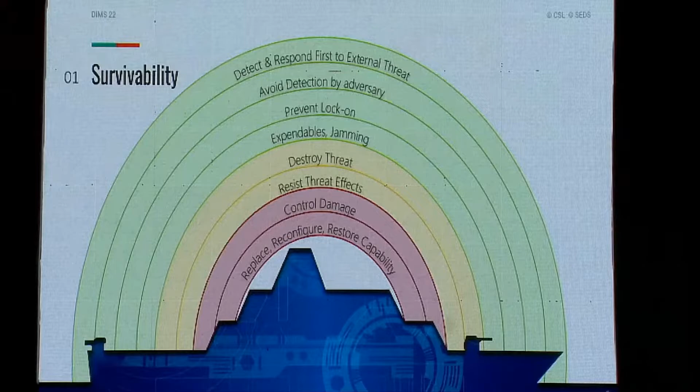Vulnerability is about the selection, disposition, as well as integration of weapons, and how you destroy a threat, for example, close-in weapon systems or missile defense systems, and also resisting the threat effects. If you are attacked, how you design and build it such that the threats are within certain limits. And then recoverability is about controlling the damage, and replacing, reconfiguring, and restoring the capability of the system.

Susceptibility, as I mentioned, the first thing is about signatures. You have many different types of signatures which can be detected by your enemy. So you look at different aspects like your radar signature, the high frequency communication which can be detected and tracked by your enemy, laser signature which can be used by the enemy for ranging, optical signature, hydrodynamic pressure which can be detected by multi-influence mines and get them activated, magnetic signature,

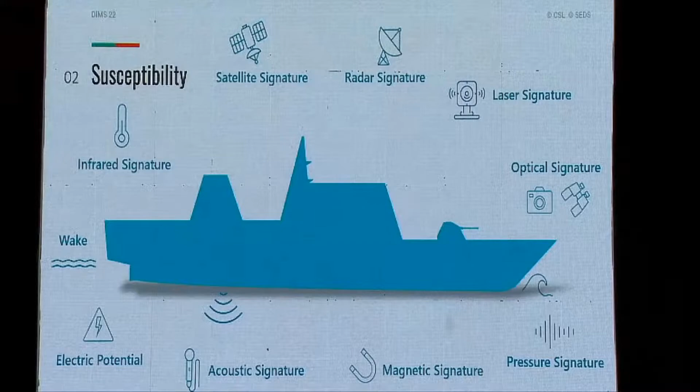acoustic signature, very important for the ships that we are working on, the anti-submarine warfare vessels, underwater electric potential, wake, which torpedoes could use to home in, and infrared signature from heating of your hull as well as your exhaust plume. So there are multiple types of signatures.

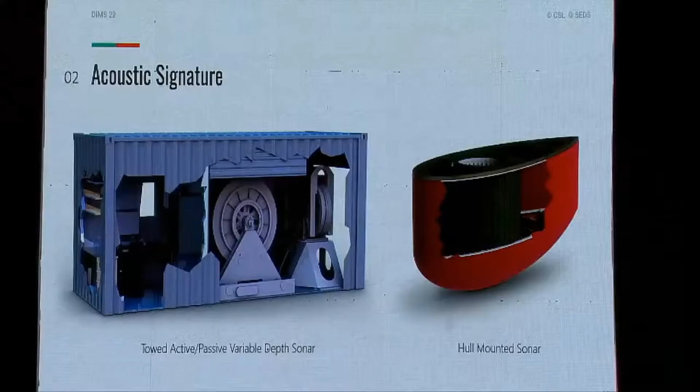And there are multiple types of sonars available. I have just put two of them which are commonly seen on ships. Especially the hull-mounted sonars are there on many ships which will be using acoustic sensing. And the one on the left is a towed array sonar, or a towed active/passive variable depth sonar. There are different types of it. A submarine might be using a bow array and a flanking array which will be trying to track you.

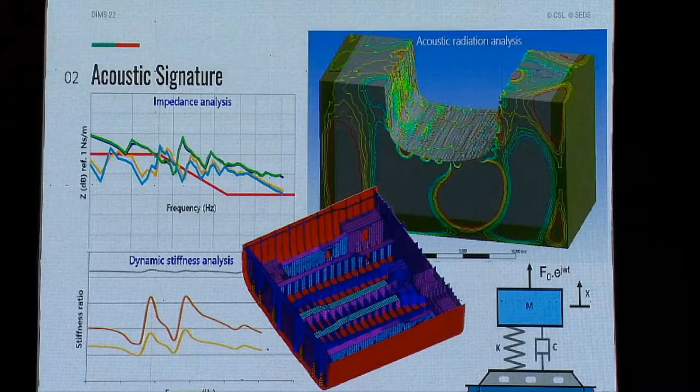And on top is an impedance analysis of the structural foundation, where impedance is the quality of the structure to attenuate the noise which is passing through it. And on the right, what you see is an acoustic radiation analysis, finally how the noise is radiated into the water. It's the fluid structure interaction one, and you can integrate the sound pressure levels and power levels and understand how much noise is getting radiated, and finally, is it within your limits.

Next is the yard slide. When it comes to URN of a vessel, yard's major point of concern comes to the procurement challenges, especially with that of the major equipment, which will have to meet specific noise values, both in terms of SBN and ABN. And also, you will have shelf life and storage requirements for the mounts and the rubber elements used to meet these targets. So you will have to be paying attention to those too.

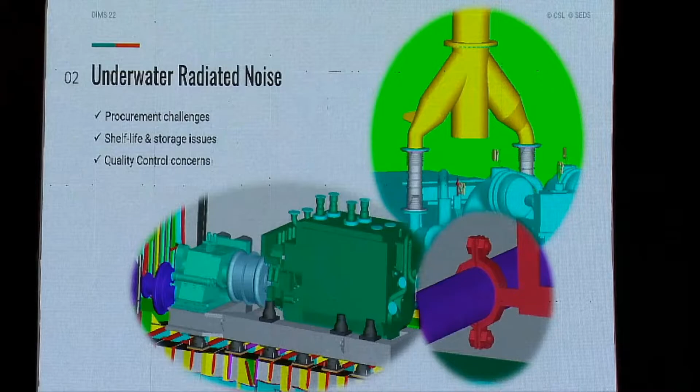Also, additional quality control checkpoints have to be established when you compare it with the commercial vessels to make sure that the design aspects are accurately captured in the construction phase also. Thank you. Next is infrared signature suppression.

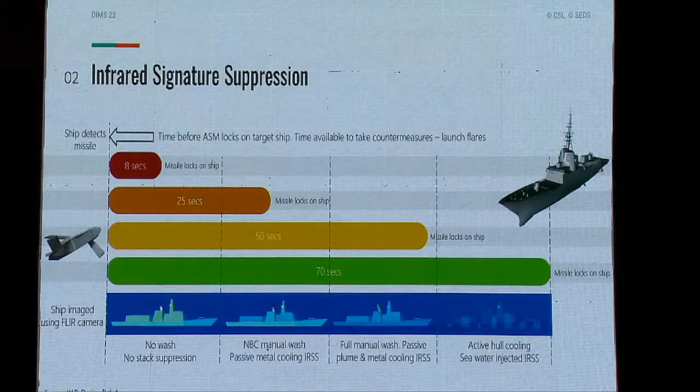So there are multiple ways by which you can reduce it. You can have a proper cable and wiring design. You can use proper antenna and equipment siting methods, active cathodic protection and filtering. Actually, your ICCP system, if not properly designed, can be giving out your location. Then proper material choices.

There are 2 methods which may not be very familiar to commercial designers: degaussing and deperming. Degaussing is about using cables run through the ship's hull to send current so that you create an opposite magnetic field and cancel out the disturbance. Deperming is where you try to cancel out permanent or induced magnetic fields by some special mechanisms or special ranges.

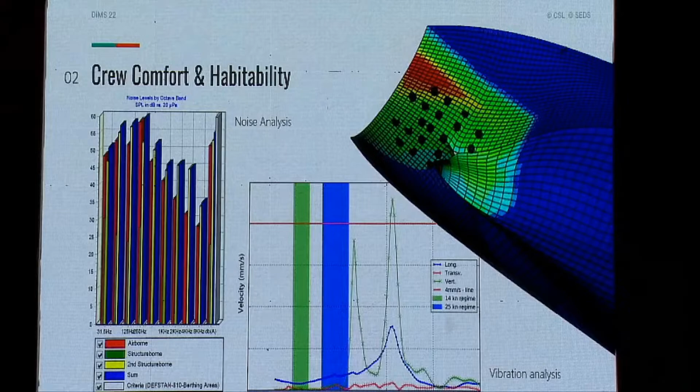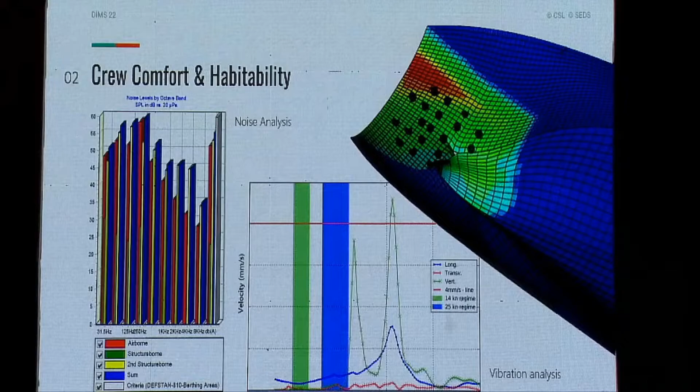Now on the left you see a spectral energy approach airborne noise analysis where airborne, structure-borne and secondary structure-borne noise components are added logarithmically and checked against the limits. And on the right what you see is a frequency response analysis of the hull structure, and the limits are not exceeded within those green and blue bands which are the eco and full speed modes.

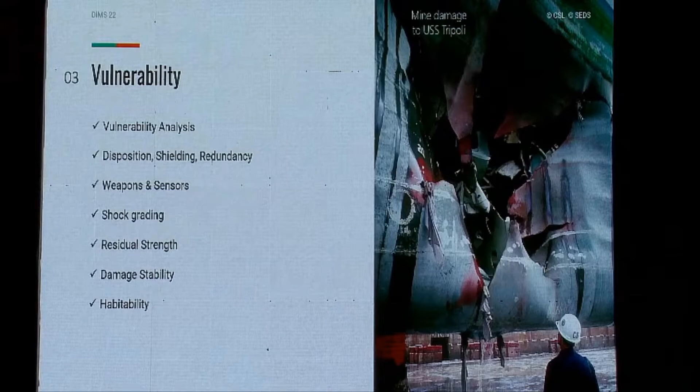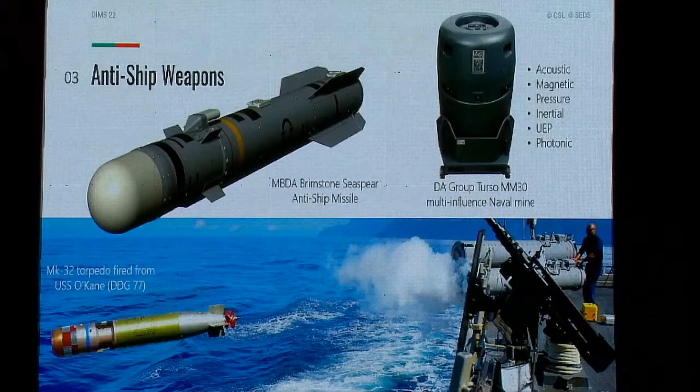So if you look at an overall vulnerability analysis: shielding, disposition and redundancy of equipment, weapons and sensors, shock grading, residual strength, damage stability, etc. Just to show you the major weapons that you must be worried about if you are a naval ship: an anti-ship missile, a multi-influence mine, which can activate itself using acoustic, magnetic, pressure, inertial, UEP (underwater electric potential), photonic signatures, and a torpedo.

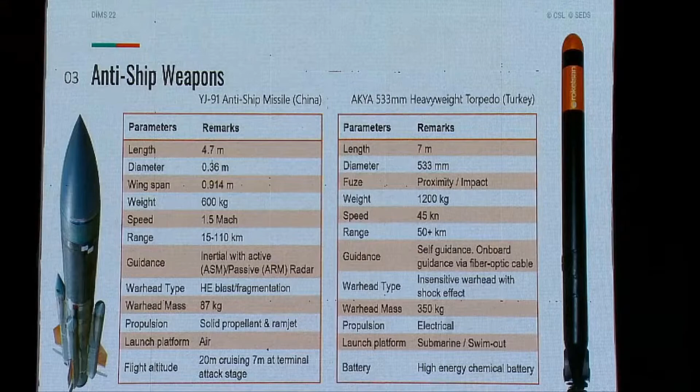And you should also know about different weapons, their parameters, like what is the warhead type, fragmentation, warhead mass, speed, etc. So for example, I wouldn't say enemy, but the YJ-91 anti-ship missile from China and a Turkish heavyweight torpedo. And there are multiple tools which are used by navies around the world to do these kinds of vulnerability analysis. I've just put them here.

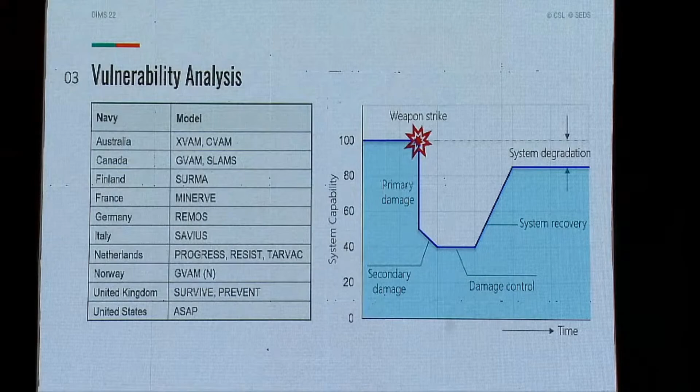And on the right, what you see is the situation in a survivability or a vulnerability analysis, where you have a weapon strike, you have a primary damage because of the weapon, there's a secondary damage with progressive flooding or progressive fire, and then you start the recoverability phase where you start the damage control, system recovery, and then system operation at a degraded phase.

Vulnerability analysis for our vessel was done using a tool called SURMA, and this takes care of loss of equipment, loss of personnel, loss of stability, and also analyzes the overall mission capability in an operational readiness level from 1 to 4. And you can also customize your weapons and ASMs, mines, shells, and your different warheads and different kinds of explosives like TNT, Comp-B, etc. It's a very important one which gives a lot of advanced knowledge to the operators, to the designers, etc.

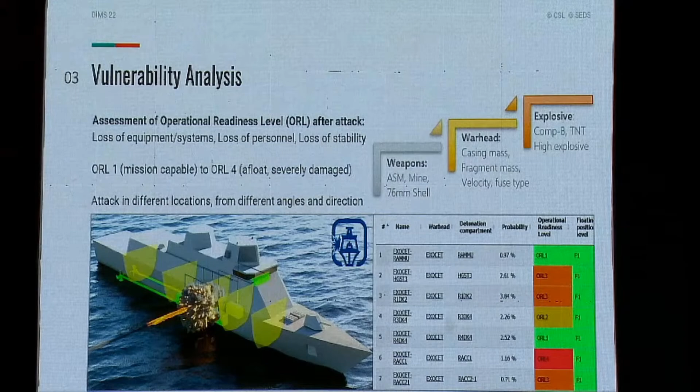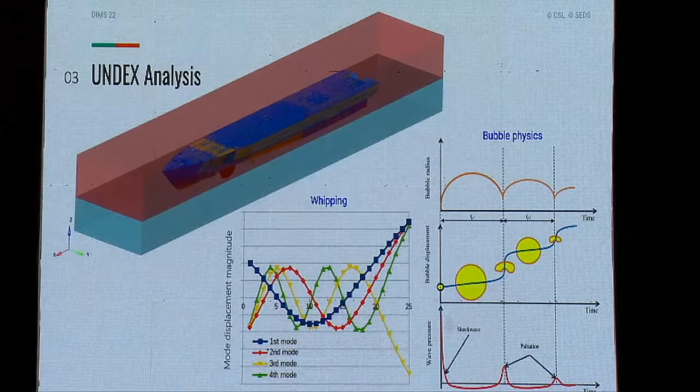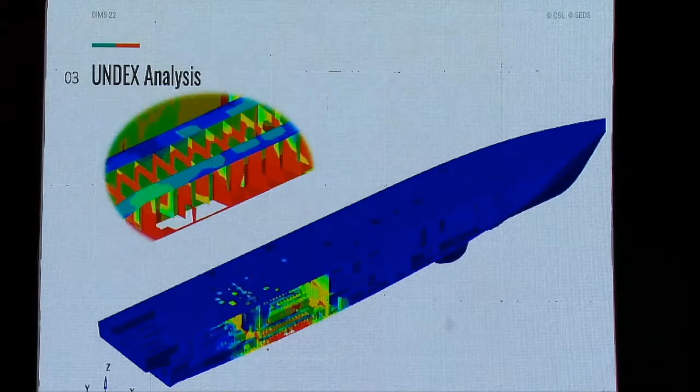And part of it is an underwater explosion analysis. So we validated this against this tool which I explained before. And you have to capture the shock wave and the bubble physics, basically the bubble from an explosion which will be pulsating up and down and which will cause whipping of your hull structure. So what you see here is a small video of that explicit dynamic analysis of an underwater explosion and how that is captured, and the one on the left is a slightly zoomed in view, and you'd like to define the material appropriately. The material theory has to be appropriately defined so that you understand how the failure happens.

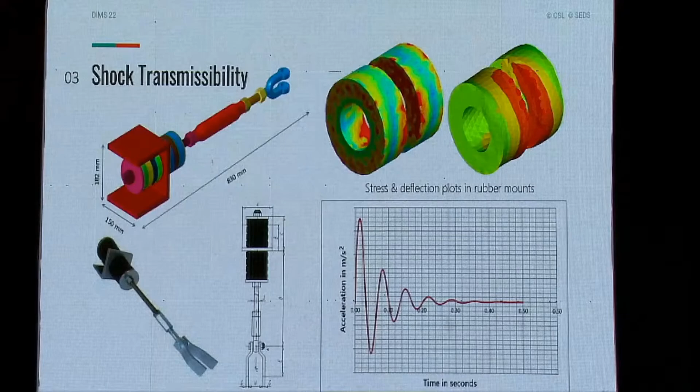Then next is shock transmissibility, where once the shock happens, how it is transmitted into the structure or to the equipment. You'll have to look at how it is transmitted through the mounts. You'll have to look at your stress and deflection plots. So the important thing is how to define the mounts, what is the material, for example, hyperelastic or viscoelastic kinds of materials, not like steel. What you see here is an acceleration plot during a shock event.

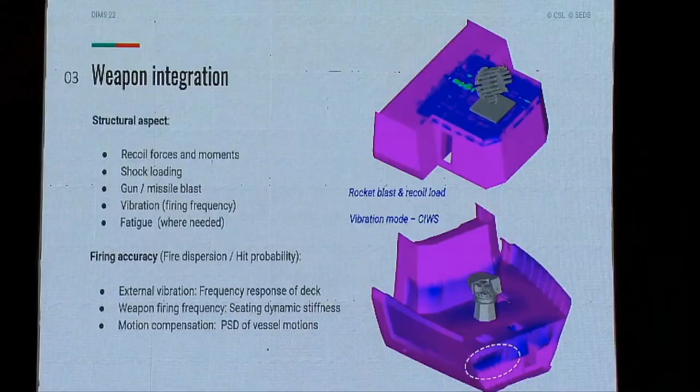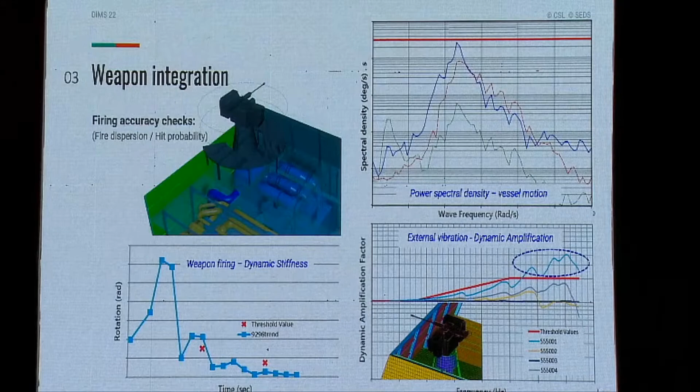Weapon integration, another very important thing. We'll have to look at different types of recoil forces, shock loading, missile blast, vibration, fatigue, etc. And then the firing accuracy checks. On the right, what you see is the vessel motion power spectral density curves against the limits, which basically looks at the vessel motions. Then external vibration and the dynamic amplification factor due to that external vibration, how vibration is affecting. And the last one on the left is weapon firing dynamic stiffness or dynamic rotation, so that it's considered. Sensor integration is similar. You will also have to look at the electromagnetic interference.

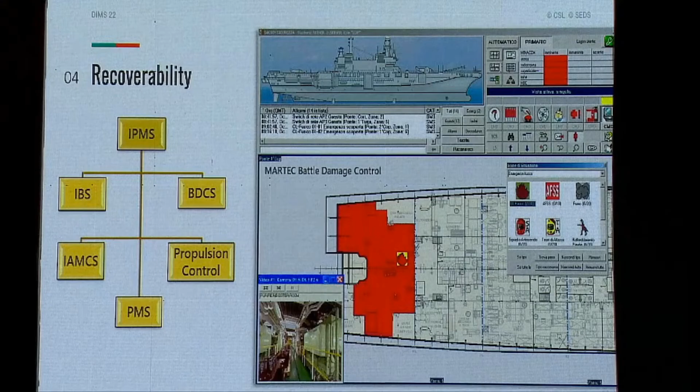As Vivek mentioned earlier, recoverability is the ability of the platform to restore its capabilities after sustaining damage. There are multidisciplinary aspects in this, along with a lot of human intervention and decision making. The vulnerability analysis Vivek talked about earlier provides a lot of inputs towards this and optimizing the vessel from a recoverability point of view. Another important aspect is to have a plan of action on how to control the damage, and there are already specific systems like the battle damage control systems shown here, already employed by navies around the world.

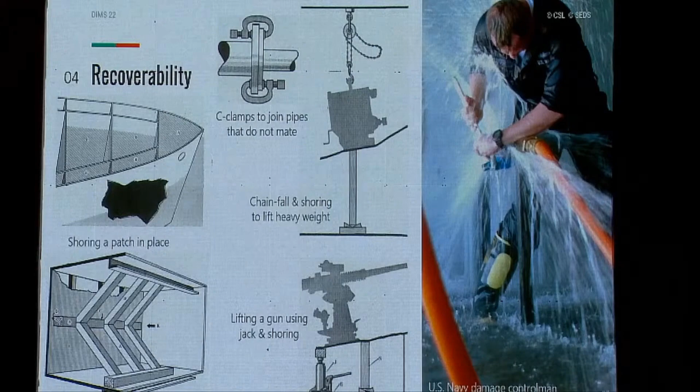Another important aspect is to have designated teams with sufficient training to undertake the damage control. There are several techniques and tools employed by these parties to control the damage. The aim is to restore the vessel at the earliest, reassess the situation, and complete the mission if the degradation is within the acceptable limits.